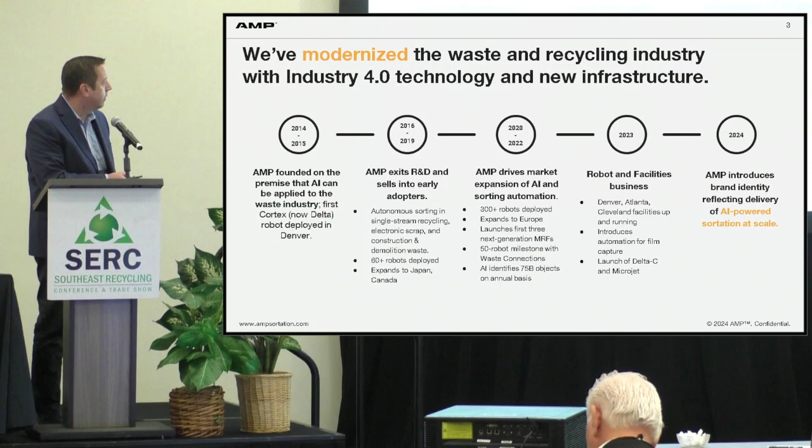I do have a couple of videos as well, so they will tell the story better than I can.

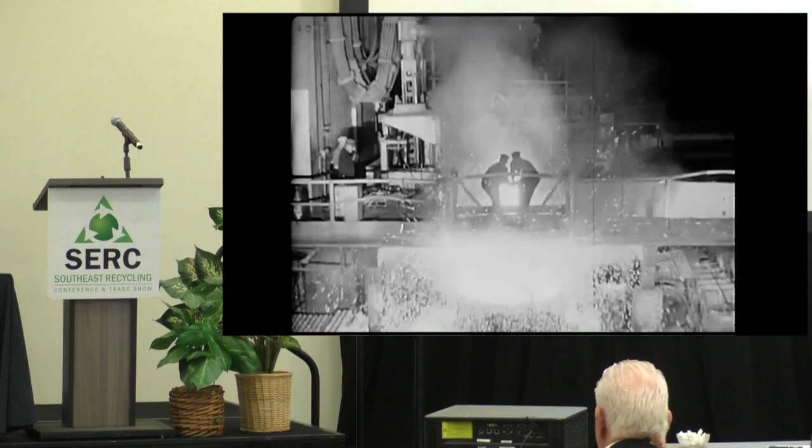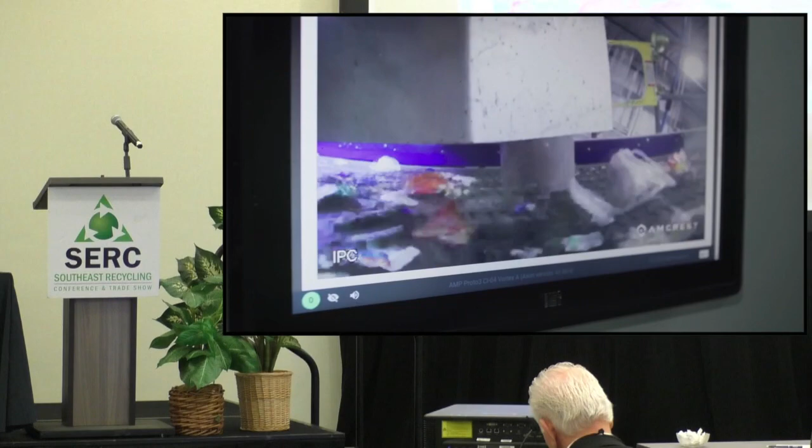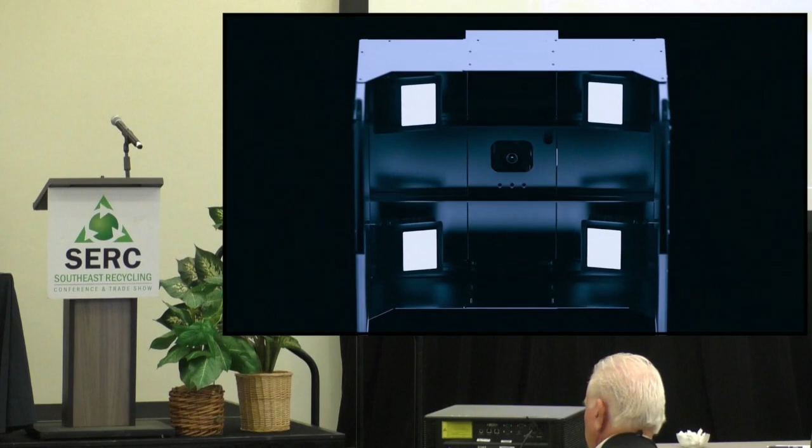There's value in waste. Always has been. Throughout history, when it's mattered most, you give us the scrap, we'll turn it into tanks, planes. We remember that there's a use for the things we throw away. The only question is how to capture it. Today, we're called to do more than ever: to process more, recover more, and to lead more sustainable communities. But what got us here won't get us there. We need more power. We need tools that never tire. Technology that's smart enough to identify everything and fast enough to keep up with a job that's never done. This is the power of AMP. Harnessing AI to drive a new era of sortation, with less labor, more efficiency, and greater resource recovery. Because to unlock the value of waste, all you need is the power to sort it out. AMP, the power to solve waste.

So what you saw there was a little bit of the facilities that we've been able to design and build. Again, it's AMP at scale here: 400 plus AI systems globally, 100 plus facilities using the technology. And again, the 75 billion object number, which is very important to the development and ongoing development of the AI and the technology.

And what that allows us to do is use deep learning to continuously train the systems. So when you're seeing 75 billion items, millions of material images and data, we're able to use all kinds of identifiers off those items to continually train the system. So whether you're seeing the colors, textures, shapes, whatever it might be, each individual unit is seeing that, registering that, and then acting upon it.

And then we're able to take all of that data back in, anonymize it, aggregate it, and then look for any anomalies. We look for misidentifications, we look for other things where the AI or the system didn't properly complete its job, and we're able to then retrain the system. Upon retraining, that information is sent back out to the entire fleet, so you have this continuous learning of all of the AI systems. That's really where the power comes with these AI sortation systems.

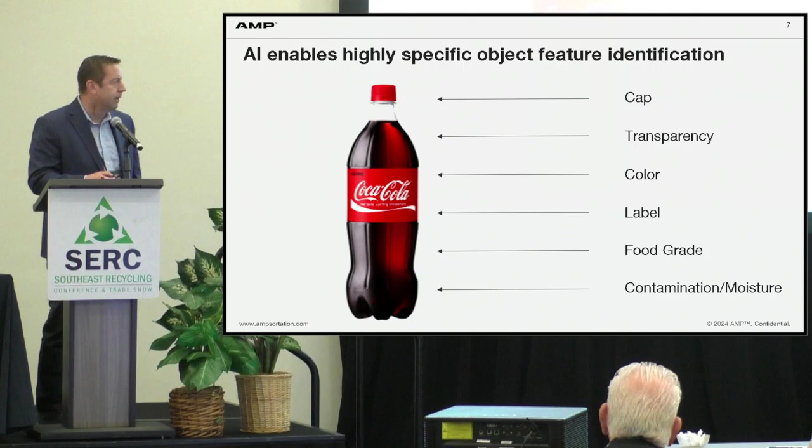But then as the system has advanced over the last 10 years, being able to identify, you have these extended categories, which could be PET green, PET blue, PET color, so that you can now get down to a more granular level, which ultimately allows you to create stronger end product coming out of your facilities. So if you have stronger end product, stronger bales coming through, more purity, then you're likely in line for higher revenues and higher dollars that come with that as well.

And then again, just as we talked about extensive classification, which really, the critical word here that I haven't mentioned yet is even down to the brand level. We do get a lot of attention from major brands that are starting to really look at recycling, look at where their items are going. I'd like to think that's all because they really earnestly do care about that. I know some of it is driven by legislation and other things that may come, or litigation even, but we do have a lot of customers that are coming and looking and wanting to understand brand recognition to know where their materials are ending up along the recycling process.

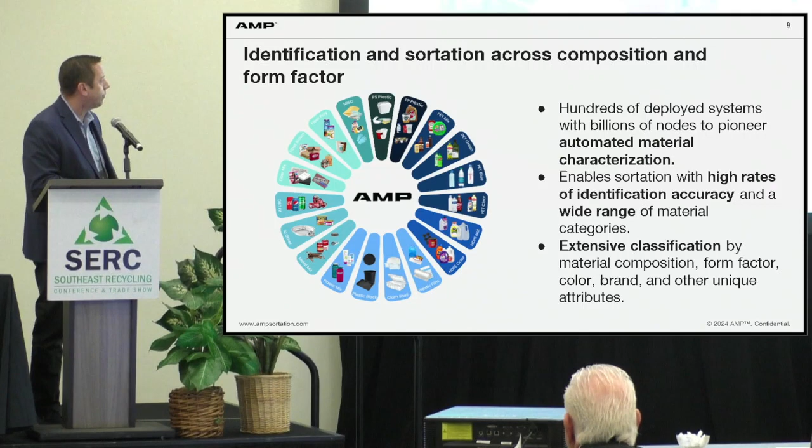So for AMP, what we do, sortation is really what we offer here. And we offer it again now in two formats, where we're going to show you a little bit about the smart sortation products that we have and that group of systems. But again, this is either on a full facility level, to where you're just responsible to bring feedstock in and take your material, off your finished goods off the back, and we can handle everything in between for you.

Or the model that kind of built the business on, which was the more traditional of being able to add AI-powered upgrades to existing facilities. But in both these scenarios, and in everything that we do, it's really based on the smart sortation solutions, where we're able to bundle the technology and the services together.

So here's an example of our kind of fleet of technology, the smart solutions that, again, we can drop into a facility on an individual basis, or we would use this technology to build a facility from start to finish for you. It all starts with the vision system, which, if you think about it, is really the eyes and the brain of the system that's identifying every item that comes through, and then making, based on all of those identifiers we talked about, making decisions...

...in milliseconds to determine what that is, and then how to act upon it based on how the facility has been set up. All of these pieces of equipment have a vision system, because you can't have an operating piece of equipment, in our instance, without that brain and the eyes of the system. But you can have vision systems individually. They can be a standalone product.

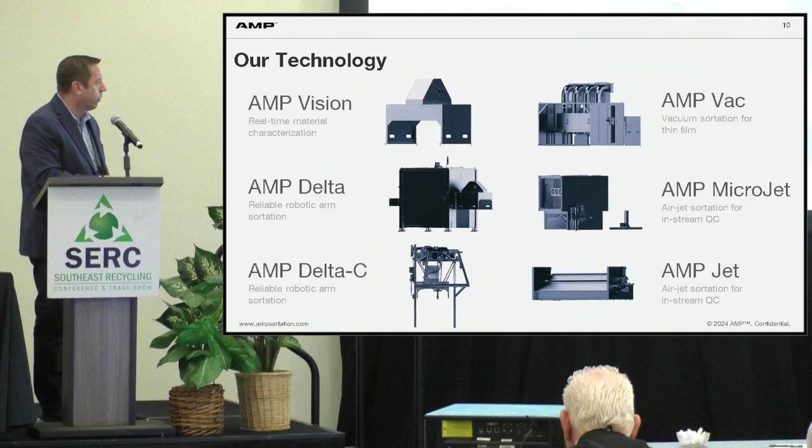And then our Amp Jet, which again is the workhorse of all these products—just think of that as an AI-powered optical sorter.

So you see an example of a facility that we built. This was pre-operation, very clean—wish, as you all know, they all still looked this way when they're up and running. But again, what this allows you, from front to back, is real-time and continuous characterization of material.

And also of suppliers—we have a very strong handle on what comes into our facility, who it's come from. Once it's processed, we have metrics we can use to speak to and strengthen relationships with those suppliers on the back end as well, based on how material may have come through.

Bunker purity and mass monitoring with real-time anomaly detection. The system can have alerts set, so if you have a spot where all of a sudden you're seeing 10 or 15% more PET than normal, the system will set alerts. It will look upstream to try to find where the problem is, and can alert maintenance staff and others so you can make adjustments in real time, rather than someone having to walk around the facility and spot a change visually.

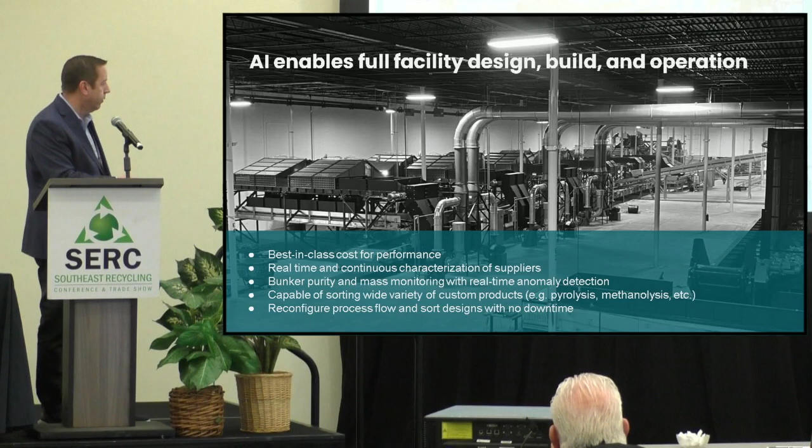Some of the other metrics: we recover over 90% of the targeted materials that come through the facility, with what we call our optimized flow control, making sure the material is metered coming in correctly and shown properly to the equipment.

These designs we've put together are scalable—we have efficient system models that piece together, so the system can grow with you in the event your community grows or tonnage increases. You can add to these facilities and make them larger through a modular design.

Also, there's CapEx models. We try to make this very easy as a point of entry, but we also have more of an OpEx model, where AMP as sortation as a service can come in and run the facility from front to back. So we operate the facility for you. That changes the economics some, but takes away the concerns of maintenance, staffing, and other things you might be dealing with today. In those scenarios, you're simply bringing material in on the front side and taking finished goods out on the back.

And then, as we discussed, flexible input streams. So whether it's single stream, some sort of secondary sortation, or MSW, we have facilities running all these different types of materials. And again, with the smart sortation technology, we're able to do some things there that maybe the industry hasn't seen.

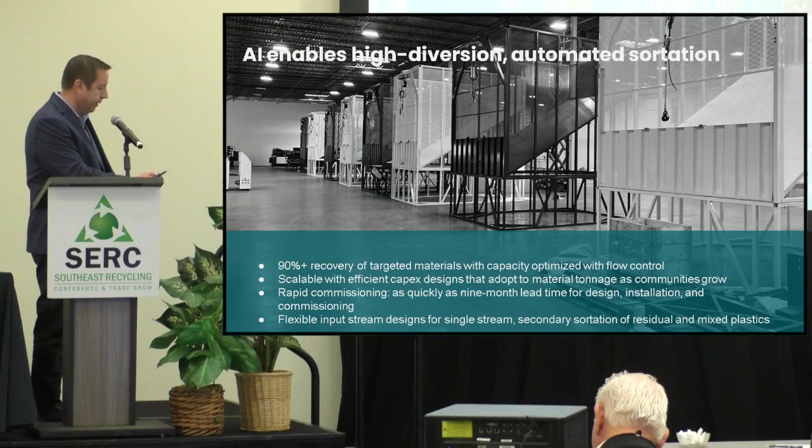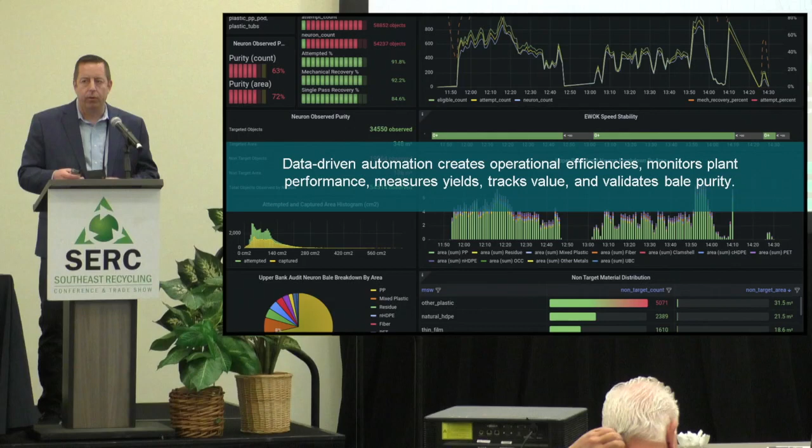So as we finish, there's one more video to show you, but this is where we are focused today: providing data-driven automation, which creates operational efficiencies, monitors plant performance, measures your yields, tracks value, validates bale purity, and ultimately provides a higher revenue stream for the facilities with materials that come through the back end.

I have one more video to end with.

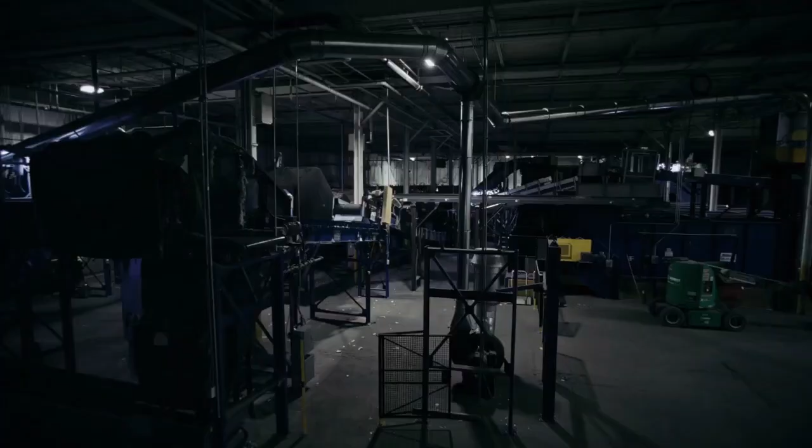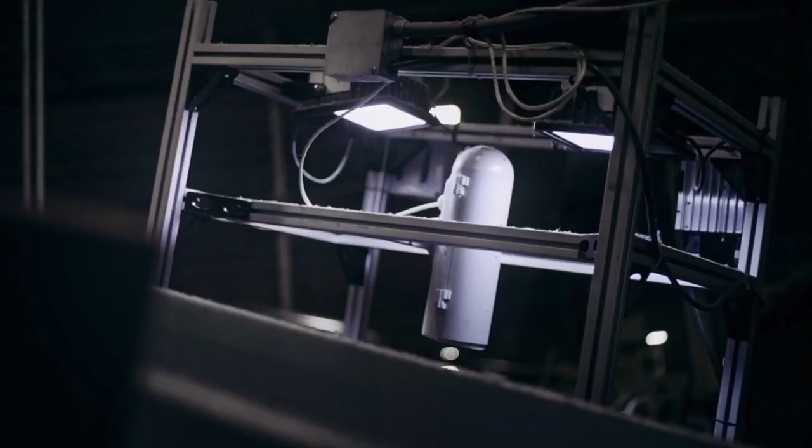Well, the first thing people say when they see an AMP1 is, where are all the people? I'm Kevin Papich, Director of Facilities Operations at AMP. Here in Cleveland, we can sort up to 60,000 tons per year without any of it touching the human hand. We're doing it with a system that knows, in real time, the composition of what we're sorting to get more value out of the waste stream. AMP1 is a fully automated waste sortation facility.

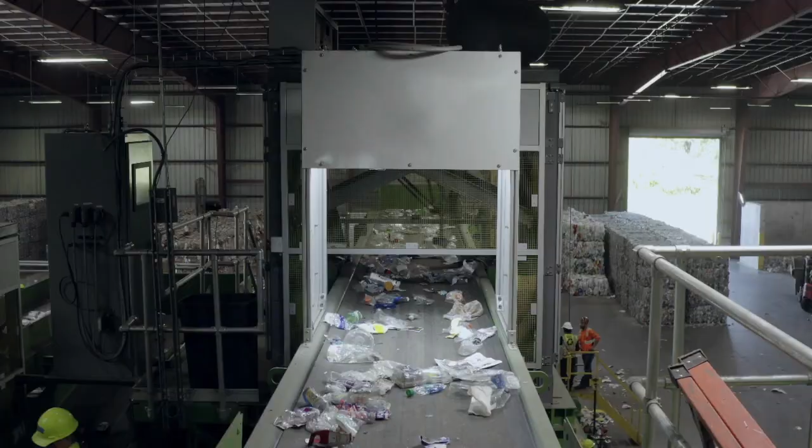People know AMP for our AI and robotic sortation. This facility uses AMP AI to distinguish between hundreds of categories and combinations of paper, plastics, and metals. We're able to tag every bale we produce with a barcode that links to precise purity and composition. And instead of a big manual sortation team, we only need a small crew focused on performance and maintenance.

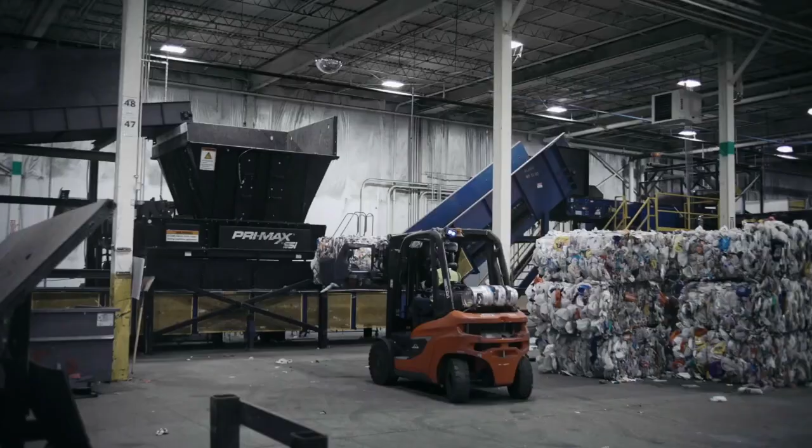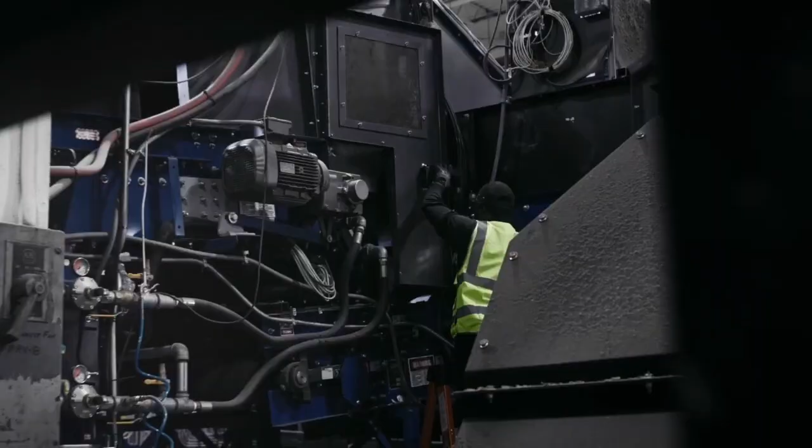Here's how it works. AMP1 can take baled or loose material as infeed. We run the material through a reducer to size it. Then, instead of manual sorters, we use AI vision and robotic automation to sort material so our people can focus on more value-added work. First, an AMP vac pulls off plastic film. Then, the material runs through a series of AMP jets. Jets sort material by form factor, material type, color, polymer, and even brand.

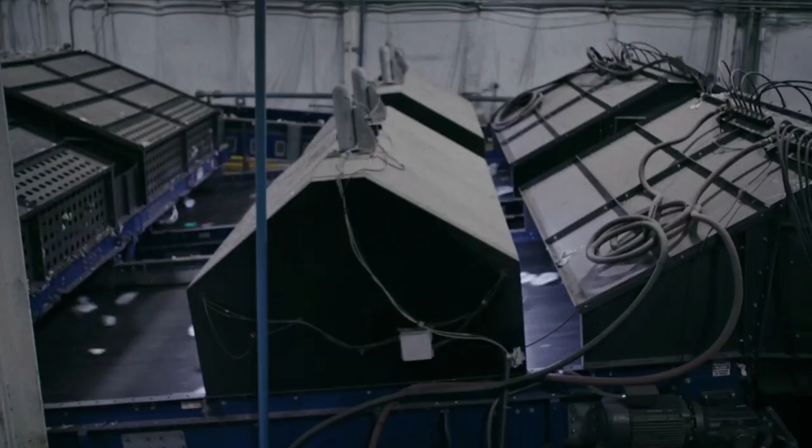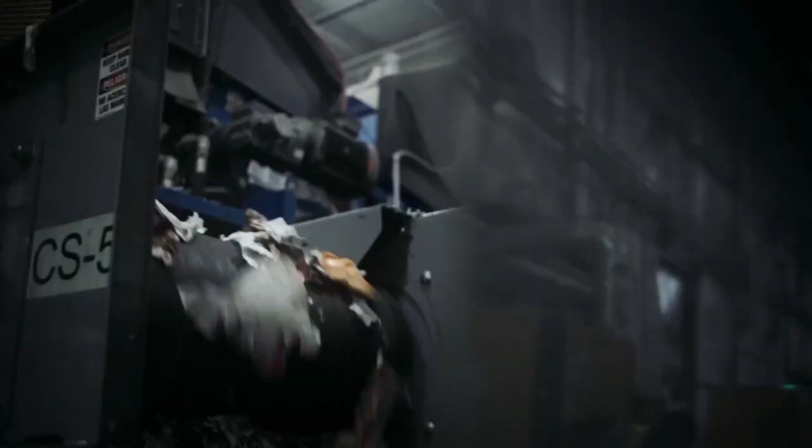We use double cut sortation to process two material streams at once. Every jet can be reconfigured in real time to sort for two different material streams, so we get a lot of shots on goal for every piece of material that flows through the line. We have a recirculation line that gives us the option to take a second or third shot at getting more value out of the residue stream. The system monitors the residue stream for heavies and purges when they reach a certain level, all automatically.

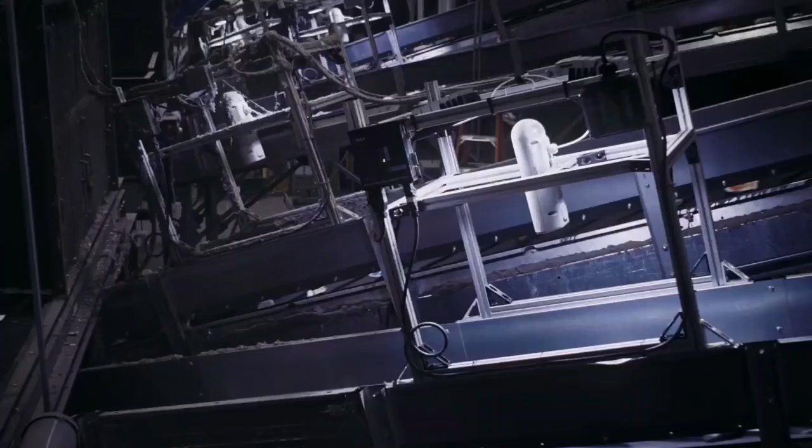Look, with AMP1, we're trying to optimize your value per ton sorted. Having AMP vision at every step of the process means we can make intelligent decisions about the trade-offs between things like tons and purity, so we send as little value to the compactor as possible. That's really the goal. At every stage of the process, AMP AI is identifying what's in the waste stream, so we know exactly how well we're performing and exactly what's ending up in every bale.

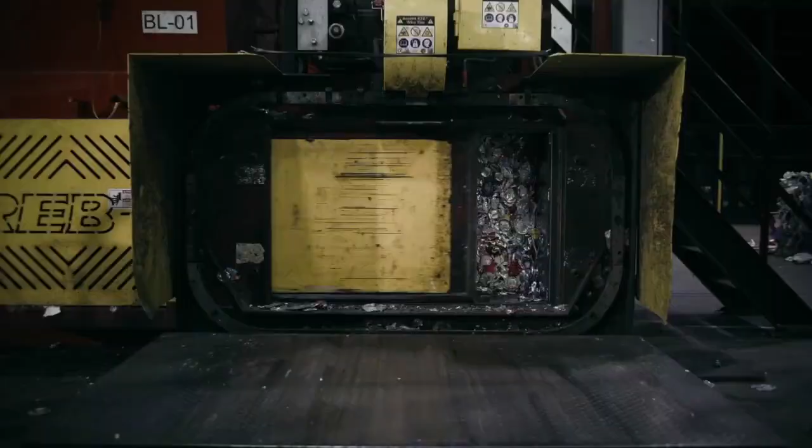All you have to do is drop off and pick up. AMP does the rest. Only AMP1 gives you this kind of accuracy, flexibility, and real-time customization. That's the power of AI sortation at scale.

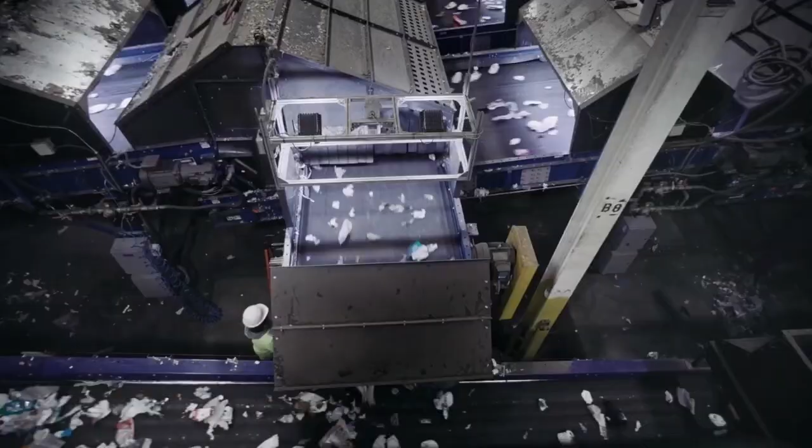So what you saw there was a little longer form video showing the process of the smart sortation equipment, kind of how the material would flow from front to back coming through.